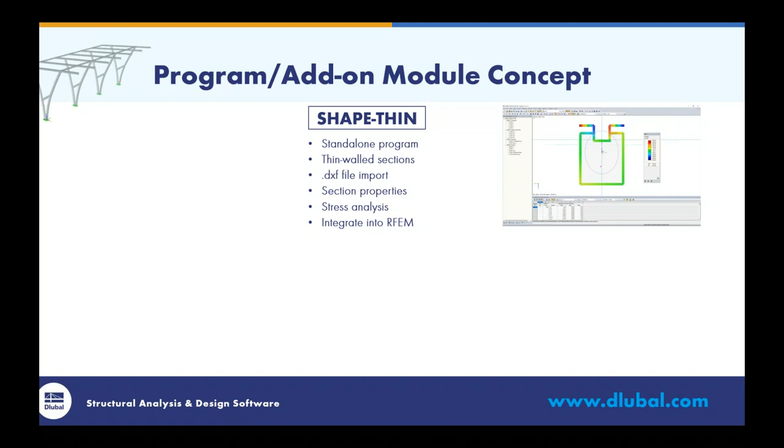These section properties will be calculated. You also have the ability to run a basic stress analysis directly within the program, which we won't be taking advantage of today, but it is an opportunity to do so. Then we take these cross sections along with their properties and we can integrate them into our FEA program, RFEM.

RFEM, again, is a separate program, and this is where we can model our structure entirely. We also can integrate with BIM software such as Revit, Tekla, AutoCAD. We can fully load the structure. We can set up our load combinations, again, according to the ASCE 7, as well as many other international standards, and eventually we get a full analysis.

Now, the analysis will provide us with design internal forces, deflections, support reactions, and we can take this analysis information into our own tools to do the design. Now, if we'd like to do design within RFEM, this is where we'd want to take advantage of the design add-on modules. And in particular, today we'll be looking at RF-ALUMINIUM ADM.

So this is nothing more than just a dialog box that is within RFEM that allows us to do member design for aluminum per the ADM 2010, the 2015, and we have both ASD and LRFD. This does include both ultimate and serviceability design, so we can check deflections as well. This also includes custom extruded sections, which we'll see today, where we take this section from Shape Thin into RFEM and we can design it per the ADM.

Now, this is for unwelded member design. Hopefully, at some point in the future, we hope to add the welded checks, but for now, keep in mind that it is only for unwelded members.

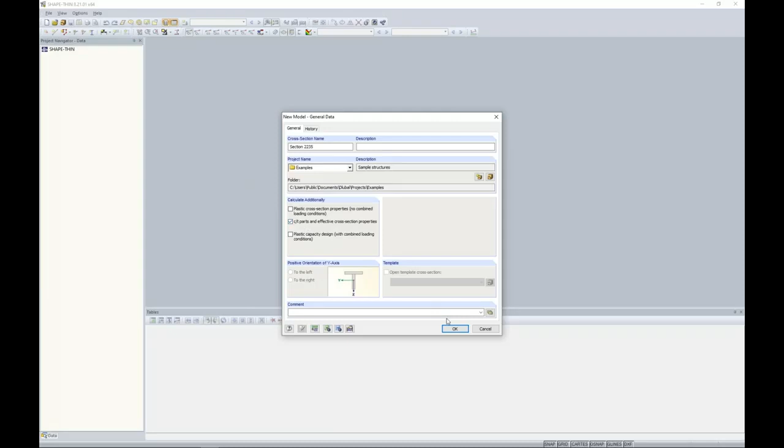So this is not something that maybe some other programs can do, but that requires maybe a little bit more additional work within ShapeThin itself to define this section, and we'll go ahead and see that now. So when I click import, we are brought into our graphical view here where we can go ahead and place the DXF background layer. Now there are a few options here for how we exactly want to place this DXF file. And I'm going to choose this one here where I can further edit it.

So I select this center node, I snap here to my origin point, I can right click to exit out of this dialog box, and now you can see this background layer here. Now it's not so simple that we can just simply mesh based on this import here and calculate the cross-section properties. We somewhat need to trace over this background layer again, and that's to determine the width to thickness ratios for eventually local buckling. But we do have some powerful tools that allow us to actually do that fairly easily.

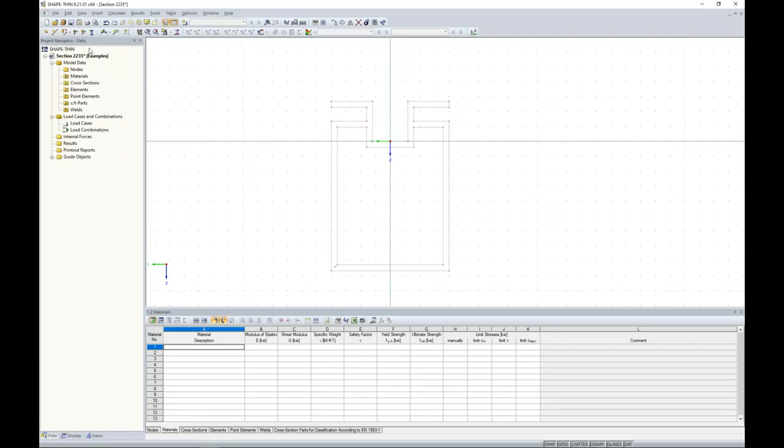So under edit, we have set elements with DXF template. The first option here is to set the center lines. What I can do is to zoom in and I select two lines, and you'll notice that the program automatically places a center line between the two selection lines. So I'm going to focus for the most part on the left side of the structure here, because once I define my elements on the left side, I can mirror it to the right side.

So in addition to setting the center lines, we have this fourth option here to set the elements. So we can manually draw in our elements up here with a new line, but we want to take advantage of these tools that just make our life a little bit easier within ShapeThin. So I want to set my material right now. So I can open up my material database, and you'll see over on the left we have our filters. We can filter to metal, to aluminum, to the ASTM, and eventually the ADM 2015. And we have quite the long list here of all the aluminum materials directly from the standard.

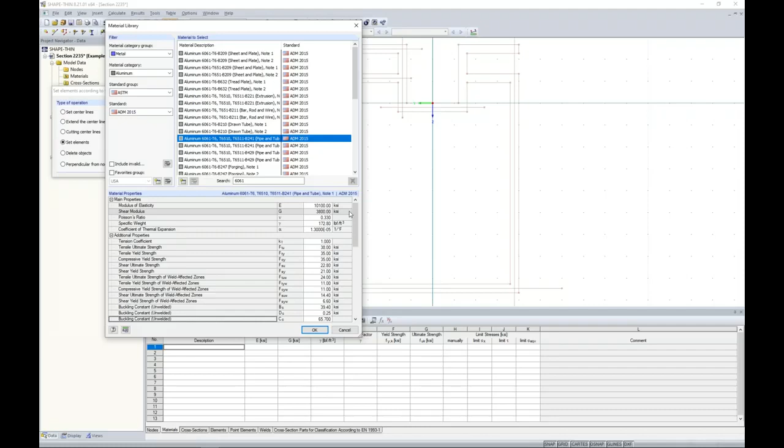Now, if I want to search by a particular material, for example, I can type in 6061 and I can see all of the applicable materials here, where I will choose 6061 T6 for pipes and tubes. Now, all of my material properties are defined here. Quite honestly, the material definition is not so important within ShapeThin if you're not doing a general stress analysis, which we're not today. Eventually, once we get into RFEM, we're actually going to have to redefine the material anyway, but this is just a good introduction of where you can find the materials within the database.

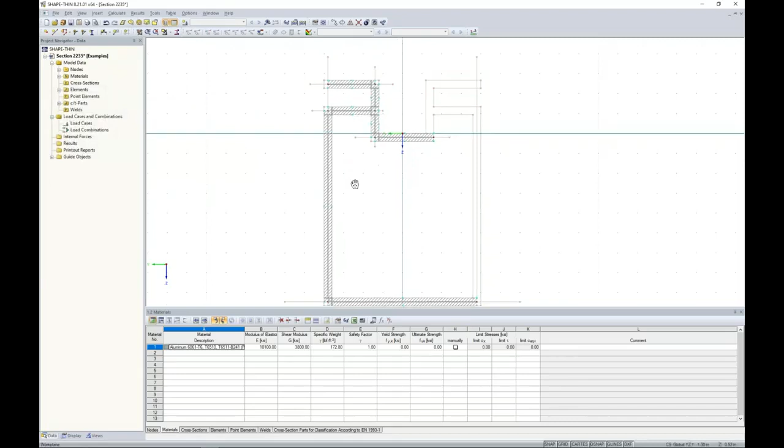So now what I can do is just to simply click on these center lines, and the program detects where the outside boundary lines are for the thickness of these elements. So once I have completed, for the most part, the left side of the structure, you'll notice up here, I want to actually drag this one element to the end. No problem. I can just drag and drop it, and it will snap right to that end point.

I can highlight all of my elements here and use my mirror tool. And the mirror tool is exactly like what we would find in AutoCAD, for example, where we can create a copy. We can mirror about the global z-axis and the origin point. I click OK, and now the program has created all of the elements on the right-hand side. It does create a couple little small segments here that I can just simply delete with my keyboard.

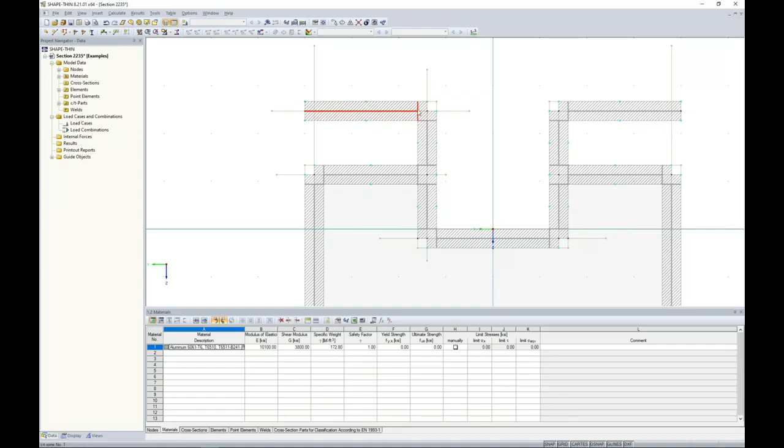Now, you'll see these symbols at each element, and these are the width to thickness symbols, those c/t parts. So this is what's recognizing width to thickness, but even more so, you'll notice that at these closed ends, we have what looks like a T symbol, but at the open ends, we don't have that same symbol. So this, again, is important for aluminum design to tell the program how the edges are supported.

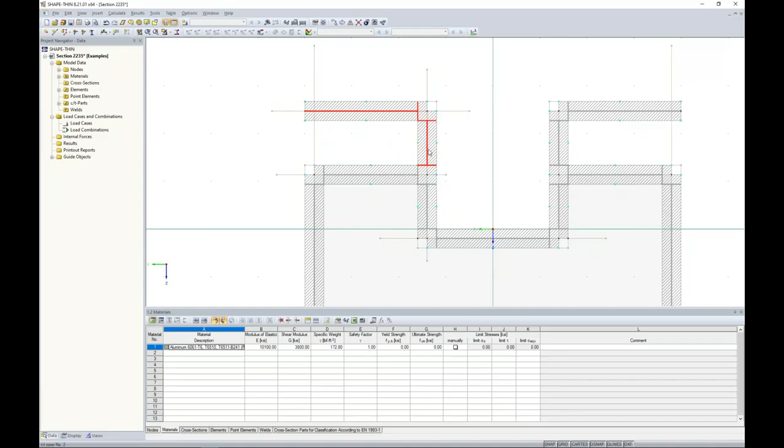And over on the right hand side we can see that it's supported, but over on the left hand side it's not supported. Again, important for local buckling. When we look at one of these other elements that's supported on both sides, we see that T-type symbol on both sides.

So that's all that we need to do, and now we're ready to run our calculation to determine the cross-section properties. So when I go to run the calculation, I will immediately get an error, and it says material number 1 Fy is not positive. So this is the yield strength for my aluminum, and I can immediately look down here to my table, and the program jumps to Fy where it's set to 0.

Well, the reason for that is because aluminum has different yield strengths depending on if it's for tension, for compression, for shear. So all we need to do is just to set some type of placeholder here. Fy equal to 30 is perfectly fine. So that's the reason why the program populates 0 there. So we can rerun our calculation, and now we can see that we are presented with our results.

Most importantly is if we take a look at table 4.1 for section properties, the program has automatically calculated all of the cross-section properties for us, including area, moment of inertia, warping, things like that. So everything has been done automatically according to my calculation.

Now, it's very important now that I save these results. So you have to save the results with the cross-section properties, because in order to integrate in RFEM, we need to know those, and that only occurs with the saved results. We will get a message in RFEM when you try and integrate a SHAPE-THIN section without running a calculation first. So that's all that is required from the SHAPE-THIN side.

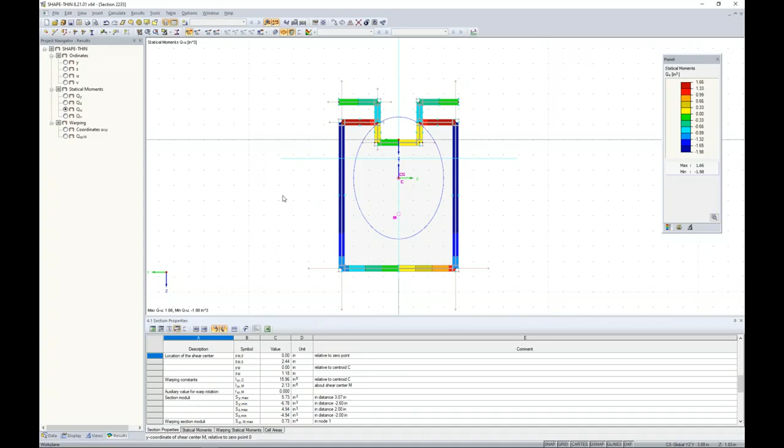So now what we can do is to jump to RFEM. And RFEM, you'll notice, has a very similar interface to SHAPE-THIN. So what's great is that if you know RFEM pretty well, then SHAPE-THIN should come pretty naturally. We want to give this one a name, so we'll call this one Webinar 100. The type of model is 3D.

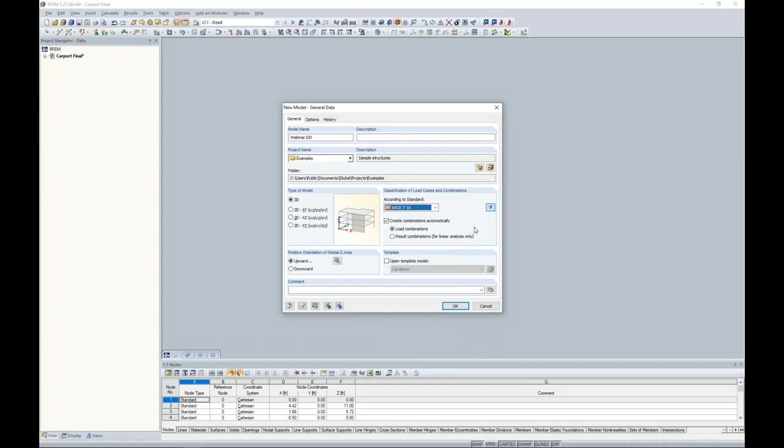We can generate the load combinations automatically according to the ASCE 7 2016. Now, you can see in this drop-down box, we have many other international standards as well, including the NBC 2015. You can always uncheck this checkbox here, and what this allows us to do is to manually create the load combinations instead. But today we want to take advantage of the load combination generator, so we click OK, and we are brought into our main program RFEM.

So to give a quick overview, again, for those of you who are not familiar with RFEM, we have our graphic window right here in the center, and we'll begin to model our structure, and we'll see that built up visually here. Down at the bottom is our table, and we can always import and export data to and from Microsoft Excel. This includes our results that will eventually be presented to us in table format as well.

Over on the left is our project navigator. So as we begin to generate this model here, all of my input data, including my loads, my load cases, combinations, will be all available to me within the project navigator so that I can make quick changes to entire cross sections or to entire material groups.

If we scroll down a bit further, this is our long list of add-on modules. So this again is why we have the concept only pay for what you use, because quite likely you won't utilize most of these add-on modules depending on the materials or the international standards that you utilize for your projects. And finally, we have our tools up at the top, which we'll be utilizing today.

And that brings us to the creation of our first column here, where we will go up to our quick tool here to draw a new member. So when we choose this option, we want to select the member type beam. We can open up our cross-section library. And for aluminum sections, we will probably typically be working with the parametric thin-walled sections, or we can take advantage of the ADM sections directly from the standard itself.

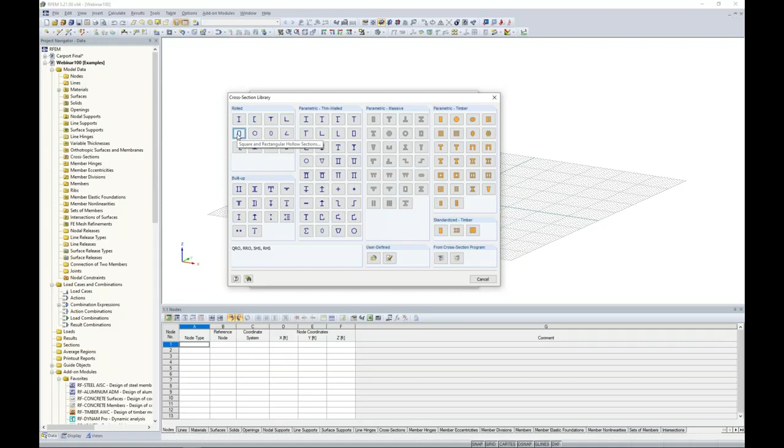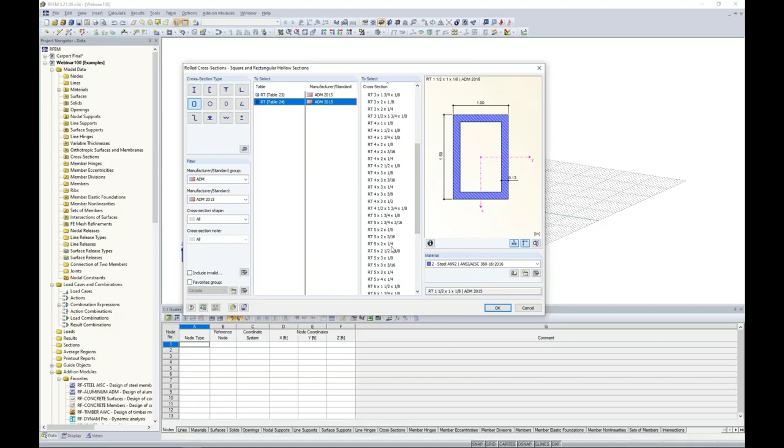So with that, we will choose a hollow square section for today. So I click on my HSS sections, I filter over here to the ADM, and we'll see an additional filter to the ADM 2015. Now, for my first column, I want to select a 5 by 2 by 1/4, and I can just choose it right here in my drop-down box.

Now, the material by default when we first open up the program is 4,000 psi concrete or steel A992. So what we need to do is to choose a new aluminum material from our database.

Well, that's quite easy by launching our material database, and this should look very familiar. It's almost exactly like what we saw within Shape Thin. We can use our filters over on the left to filter to metal, aluminum, ASTM, and the 2015. Once again, I can type in 6061 and I can select 6061 T6 from my list here for pipes and tubes. All of my material properties are presented in this table. I click OK, I click OK.

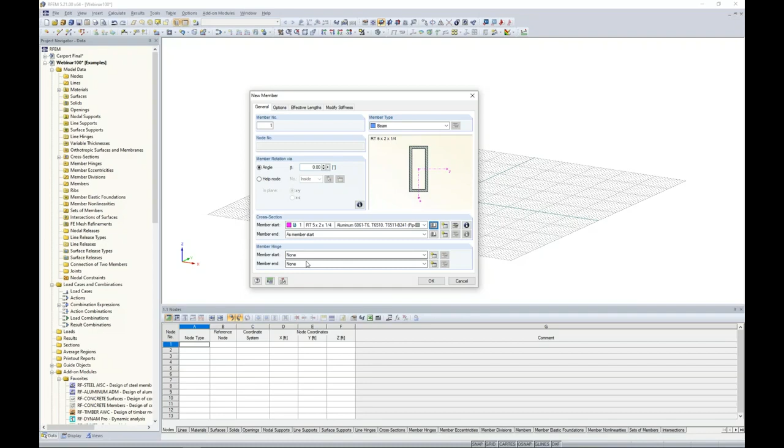And just to also preface this, our model today, everything will be fully fixed, but if you did want to set a pinned member end, you would do so within the same dialog box here by creating a new member hinge. But leaving everything fully fixed, that is what the type none means, so we'll just go ahead and go with that for now. So we want to begin by drawing our column, but I want to change around my drawing grid here to the vertical direction. Well, I can do so by changing my work plane into the XZ plane.

I can scroll down, and instead of a straight line, I actually want to create a curved column, and I can do so by selecting an arc here. So I snap to the origin at 0, 0, 0, and then my second point can either be defined on my work plane here, but in my particular case, I don't have exactly 1 foot increments for my second point, which is what the default is for my drawing grid. So what I can do is just type in the coordinate points directly at 4.42, 0, and 11.

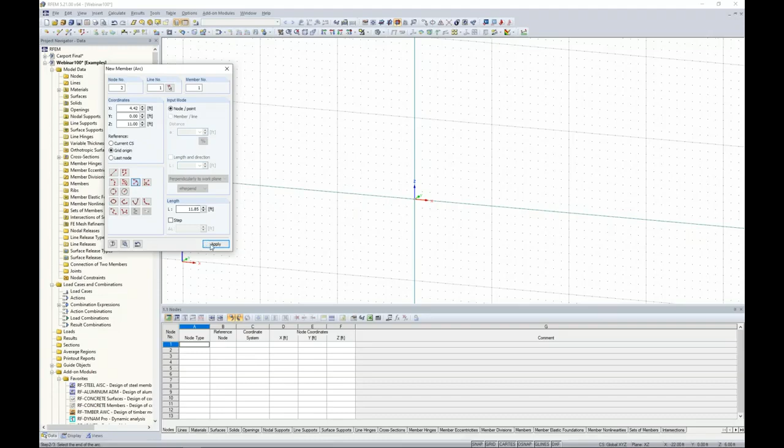Now you want to make sure not to drag your mouse outside this dialog box because as you'll see, everything resets to the current position of my mouse on the work plane. So we'll retype that in at 4.42, 0, and 11. We scroll down here to apply. And now you can either define the radius by once again clicking on the work plane here, or I can just type in 30 feet on my keyboard and hit enter. And so now we should see the curved aluminum column shown here.

In a similar sense, we want to go back and draw a new member. And I want to take advantage of the exact same cross section, the same material. I click OK, and we want to create another curved member. So we'll choose the arc option. Now my first point, again, doesn't fall at these 1 foot increments, so I can specify negative 0.5, 0, and 0. I click apply. Now my second point is going to be negative 3.5, 0, and 11, and I can hit apply.

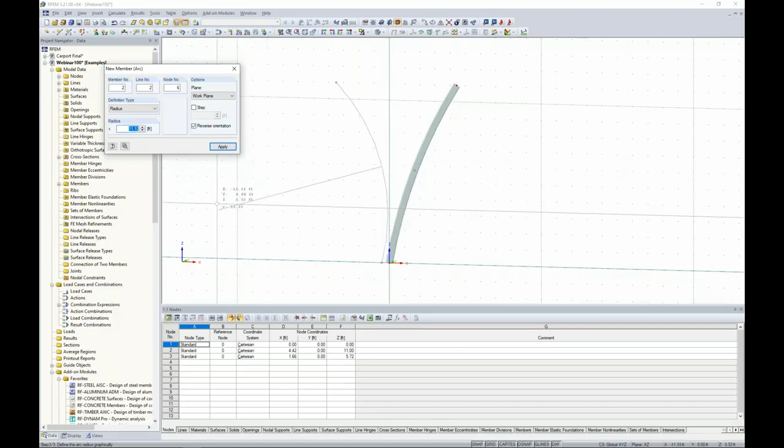Now you'll notice that my radius is actually curving the wrong way. Well, that's no problem. All I need to do is just check the checkbox for reverse orientation. I'll type in 40 feet on my keyboard and I hit enter. And so now we have our second curved aluminum column here. The next thing to do is to apply some type of intermediate brace between these two columns, and I want to do so at some nodes along the member length that I need to create.

So I can right click on my right column and I'm going to divide the member by a certain distance. So with this distance, I have the opportunity to choose the projected direction Z. So what I want to do is to add a node that is 5.5 feet in the vertical direction starting at the base of the column. So you can see here which side is the member start and the member end based on this black arrow here. I type in 5.5 feet for my member start. I click OK. And so now I have divided this member, which has created an intermediate node there.

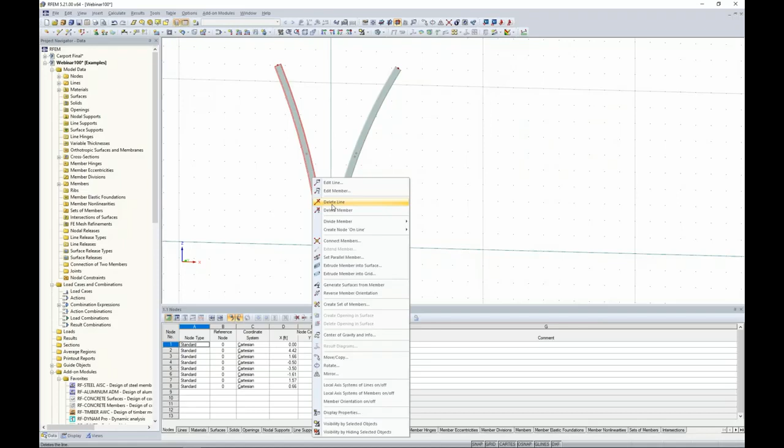I'm going to do the same thing with the left column. I'm going to right click and I'm going to divide the member by a certain distance. Again, we're going to choose the projected direction, but this time it's going to be 4 feet from the member end. You'll notice that we have the reverse orientation for this column, which is no problem at all. So now we have split apart this member as well.

I want to go back to drawing a new single member. And once again, I'm taking advantage of the exact same cross section, the same material. I click OK, but this time instead of the member being a curved element, it will be straight, where I can snap to those new nodes that I have just created to add a small little intermediate brace here.

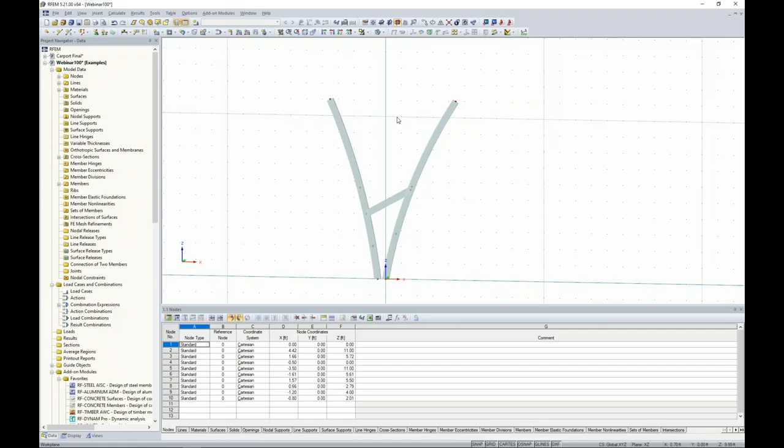Okay, so moving on to the top of our carport canopy structure, we want to import in that ShapeThin section. So what I can do is to go to draw a new member, which we are very familiar with, and to open up my cross-section database. And you'll notice that once this populates over on the right-hand side in the very lower corner, we can import the cross-section from ShapeThin.

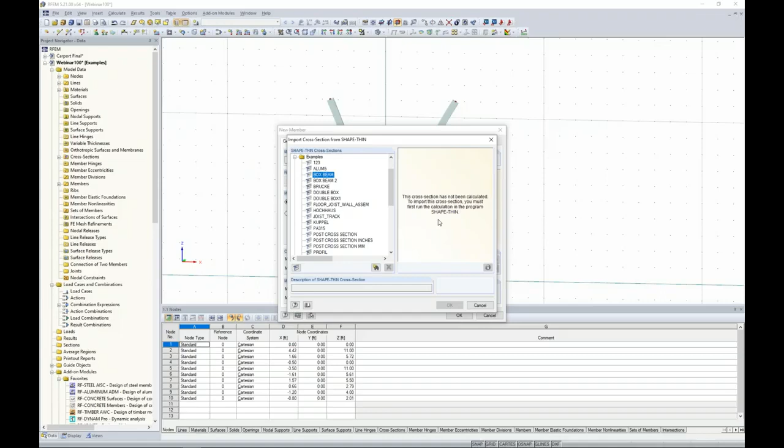So when I do this, we will browse to the file location of where I saved my custom cross-section so we can see it here. And by the way, if you were trying to import in a cross-section where the results weren't saved, you would see some type of warning or note like this, just telling you the cross-section hasn't been calculated, go back to ShapeThin and do so. So this is why the results need to be saved with the ShapeThin file.

So we can see here section 2 that we have just created. We want to import that in. Now notice when we did that, it defaulted to the first material, concrete 4000 PSI, that we have available in our model. So we actually want to edit the cross section, and instead of concrete, we're going to choose the aluminum material that we've already defined in the model. So it's now always available for any additional members that we create within this file. So I choose aluminum 6061. And we can see here that everything looks okay with the material and the cross-section set now.

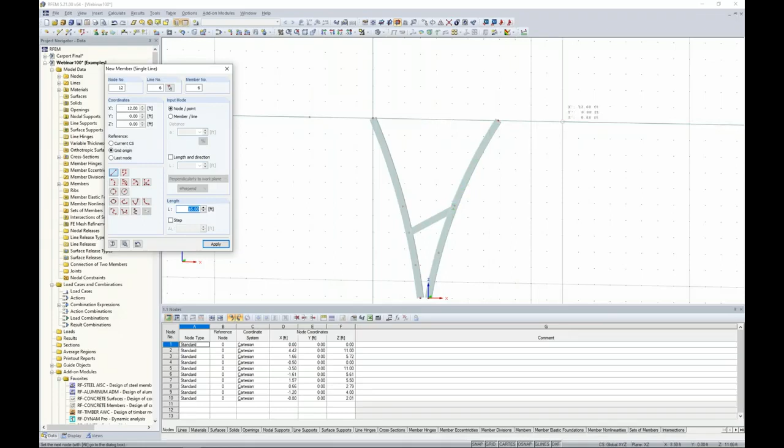I'd like to move my drawing grid so that the origin is now placed at the top of the left column. Well, I can do so by selecting this button up here to set the origin of the grid work plane. And I move to the top of the left column. And now I'm still within the dialog box option to draw my new member. So I'm going to choose a point that is about 4 feet away from the top of the column on the left. And we will span about 3 feet to the column on the right.

So what's also powerful, if I turn off my drawing grid here and I zoom in, is that we do bring in the exact rendered view of this custom cross section. So it's somewhat nice to see the orientation of the member and how it's framing in to these columns that we have just created.

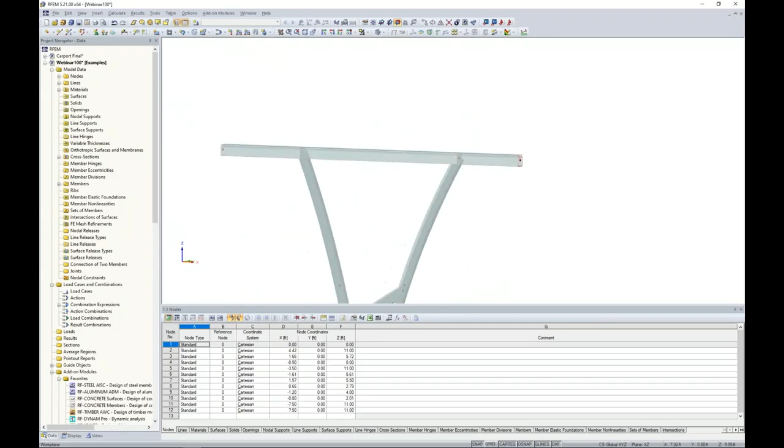So once we have created this main beam up top, I'm going to hold down my control key and select only my members. So you'll notice that I'm paying careful attention to not select the nodes. But there are a couple nodes that I do want to include. So by holding down my control key, I'm going to select the node at the top of my right column and the rear node. Now there is a specific reason why I'm doing this. I want to go to my Move Copy tool in my toolbar. And Move Copy, nothing too fancy about this. We want to make 6 copies in the global Y direction of 4.5 feet.

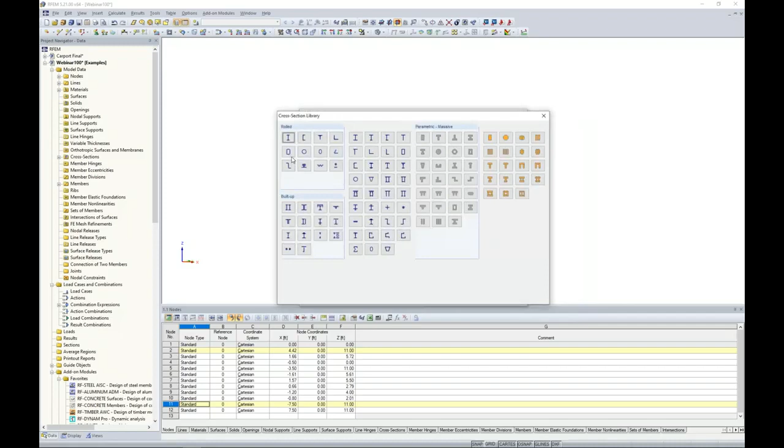And under the Edit Expanded settings, what we have the ability to do is to create lines between copied nodes. So this is why I was careful to only select a couple of nodes that I was interested in. And even more so, we can assign a cross section to those lines. And we can create a new cross section type by going to a new member. And this should bring us to a familiar dialog box where we can launch our cross-section library once again, because I do want to create a rectangular hollow section here.

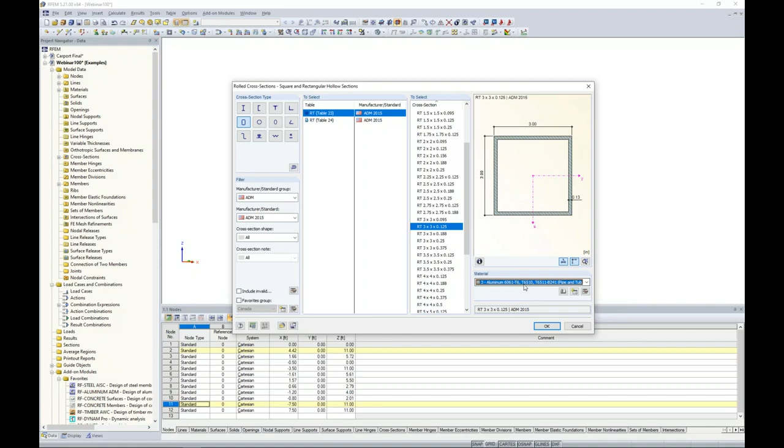So I choose this option, and over on the left we will see our ADM filters once again, and I can scroll down in my list to choose a 3 by 3 by 0.125. I select my material from this drop-down box. Remember, it's already available to us because we have defined it within the model. I click OK. I click OK, and we're back in this Move Copy dialog box.

I click OK once again, and what you'll notice happen is that not only did we make copies, but the program has placed these intermediate beams between our copied frames. So it's just taking a step out of the equation where we don't have to manually draw these beams in here. I want to take a few of these main frames, and I'm holding down my control key and selecting them, and I hit delete on my keyboard because they are not necessary.

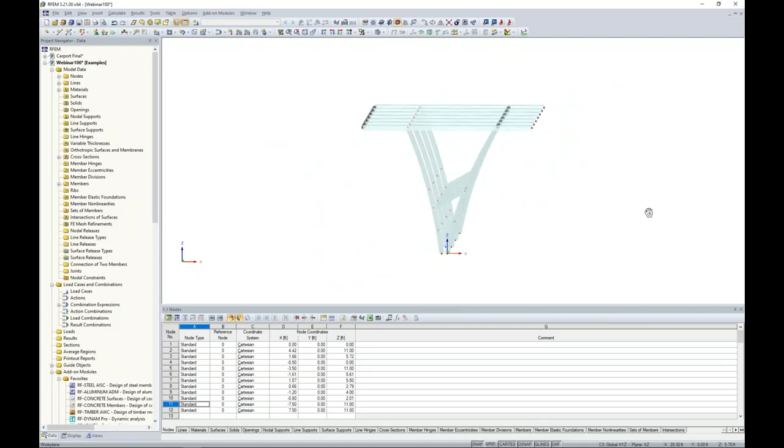So now, for the most part, a majority of our modeling is done with the carport canopy structure. A couple things to add. Number one is that if I wanted to slope this roof at 5 degrees. And normally with sloping the roof, it might be a little bit difficult because we'd have to figure out at what elevation all of these nodes should be placed at depending on their distance away from where the slope should begin.

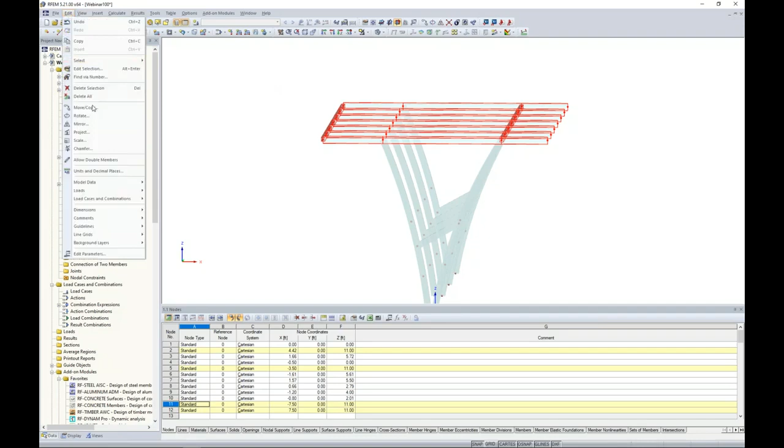But we do, once again, have a nice feature within RFEM that allows us to do that automatically. So I select all of my roof members here, and under Edit, we have the rotate tool. So with the rotate tool, we can define an angle of -5 degrees. We want to rotate it about the global y-axis, and we want to rotate it in the direction of z.

Then I can graphically pick the point where I'd like the rotation to begin. So I choose at the top of my right column any one of these points. The program populates the coordinates. I click OK, and now my roof has a 5 degree slope to it. So again, just a nice feature so that we don't have to manually determine what all these different elevations are based on a 5 degree slope.

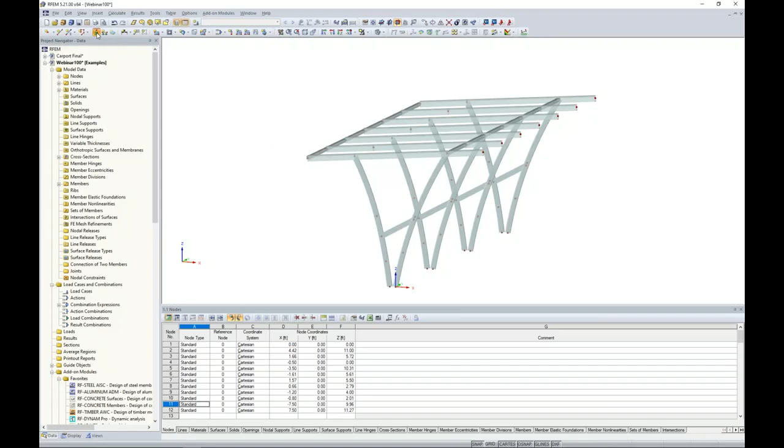The last and final thing to do with modeling of our structure is, of course, to support it. So we can go up here to a new nodal support. Now we have a few default options, including hinged and rigid, pin type support, or fully fixed. We can always create our own type of nodal support, which you'll see are 6 degrees of freedom here for rotation and translation. If you have partial fixity for somewhere in between fully fixed and fully released, you can set that.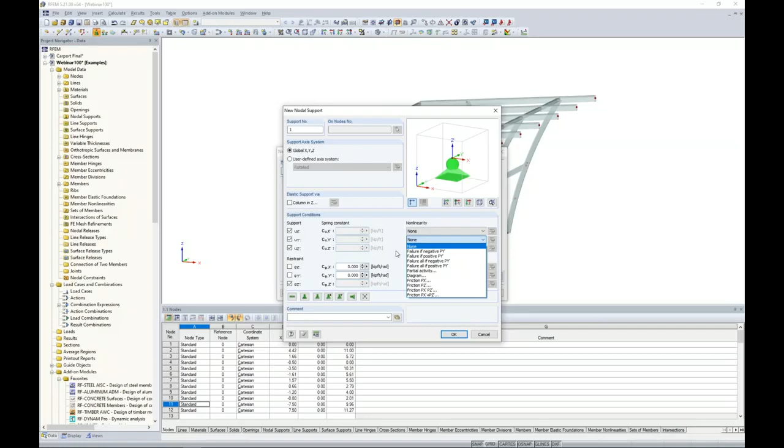Or because RFEM is a nonlinear analysis program, you can set these geometric nonlinearities so that perhaps the support fails in uplift, for example, or sliding or friction or anything of the sort with partial activity. For today, we want to choose the default fully rigid option. I click OK. All that I need to do is to highlight across the bottom of my structure, and now those fixed supports are applied to the bottom of those columns.

So we are essentially done with the modeling, and we want to move on to loading. And what we need to start off with loading is, of course, defining our different load cases. And we can do so within the option up here to define a new load case. So this will bring up our load cases and combinations dialog box. The first load case to create will be dead load. The action category is set to dead. Action categories are important because this tells the program exactly what load factors to apply to each load case based on the ASCE 7 or whatever standard you're using for the automatic load combination generation.

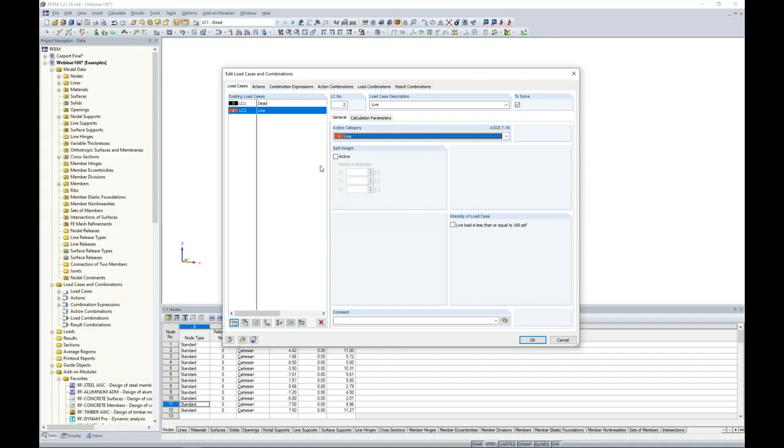The self-weight is automatically checked here for dead load, but when we create a new load case, and we'll call this one live load with the action category of live, we want self-weight to be unchecked because we don't want to account for it twice. Now, because this is a carport structure, maybe we want to consider the possibility of impact loads. Perhaps a car could unfortunately drive into one of these columns, and we want to account for that. So we'll create a couple of additional live load cases for impact.

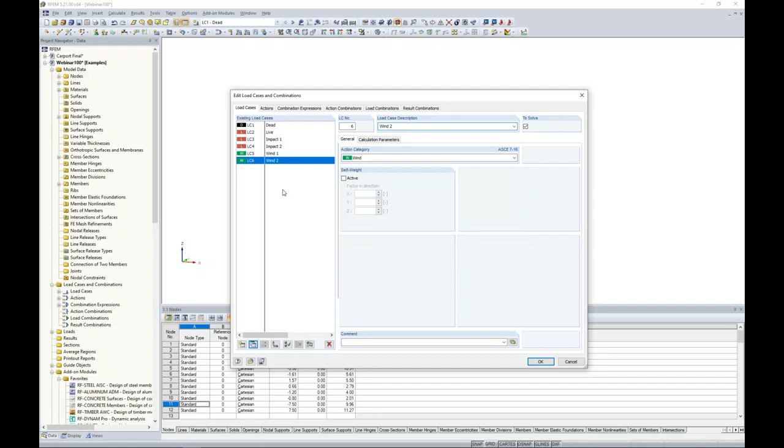So we'll call this one Impact 1. And the action category is set to live. We can make a copy of this load case and we can rename it to Impact 2. I'm going to create a load case here for Wind 1 with the action category of Wind. And once again, I'll make a copy of this one and create a second load case for Wind 2. Now, of course, you'll probably have many more load cases for your project design, but for today's example, we will just stick with these. So under the Actions tab, this is important because here are my actions that I've defined:

dead, live, and wind. Now, under live, I have my live load, which will be some type of area load at the top of my roof structure. I want that to always be acting within these load combinations, but Impact 1 and Impact 2, I don't want everything to act simultaneously as we have it set here. Instead, I want Impact 1 to apply or Impact 2 to apply along with the first live load. So how we can do that is by setting the option for differently here. So live load can be set to no group, Impact 1 can be set to group 1, and so can Impact 2. So now the program will apply Impact 1 or Impact 2. Alternatively, it will not apply them at the same time.

It's a similar concept for wind load. Wind loads are automatically by default set to alternative, so it won't apply wind load 1 plus wind load 2, it will apply wind load 1 or wind load 2 within our load combinations.

The combination expressions, this is just the program letting me know that it will create LRFD load combinations as well as ASD load combinations. If we have any question about what those load combinations look like, we can click this little info button to see them listed directly from the standard.

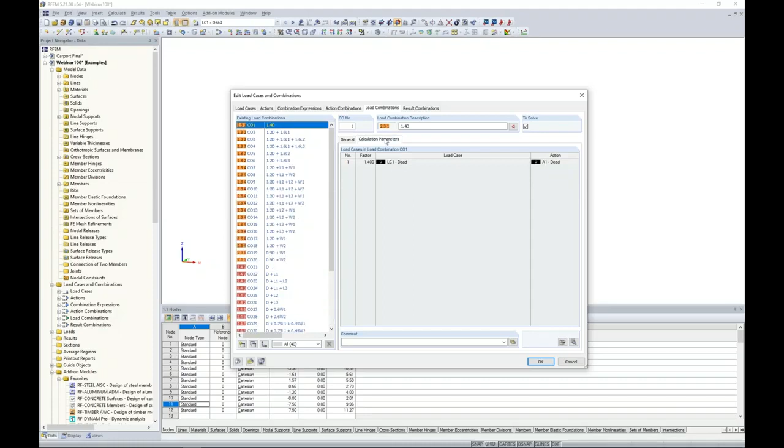Now, probably most important is the actual load combinations tab here, because this is going to show me all of my LRFD load combinations in orange and then my ASD load combinations in red. The calculation parameters for load combinations by default is set to second order analysis, considering both big P delta and little p delta for all members.

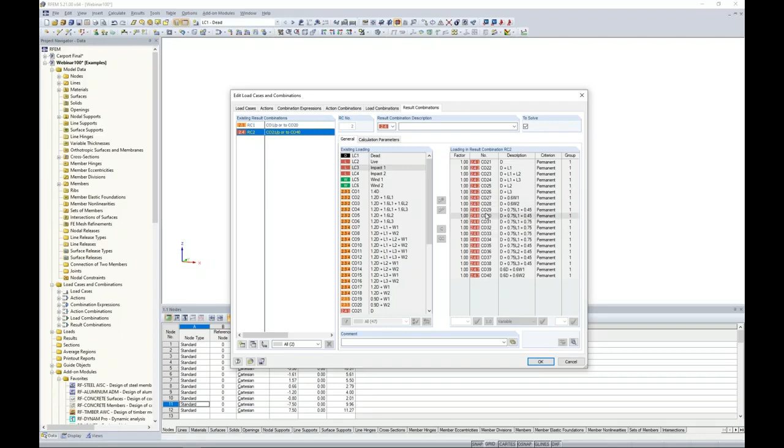The result combination is nothing more than an envelope solution. What the program does is create a result combination for all of my LRFD load combinations, and we have a result combination for my ASD load combinations. This allows us to graphically or within our tables see the max and min results within all of these load combinations combined, essentially just a result summary.

So once we are done defining our different load cases here, we need to actually apply the loads to the structure. We're going to select dead load from my drop-down box here, and I want to apply a downward area load to the top of my structure to account for, let's say, some PV panels that will be placed on top of there.

Under Tools, we can go to Generate Loads from Area Loads on Members via a plane. Rather than having to manually define what all these different member loads are based on their tributary area, we can let the program do that for us. We choose the load direction in the global Z, which will be the downward direction. We give it a magnitude here of negative 0.02 kips per square foot, and I am going to select my corner nodes here by just graphically clicking on the 4 points.

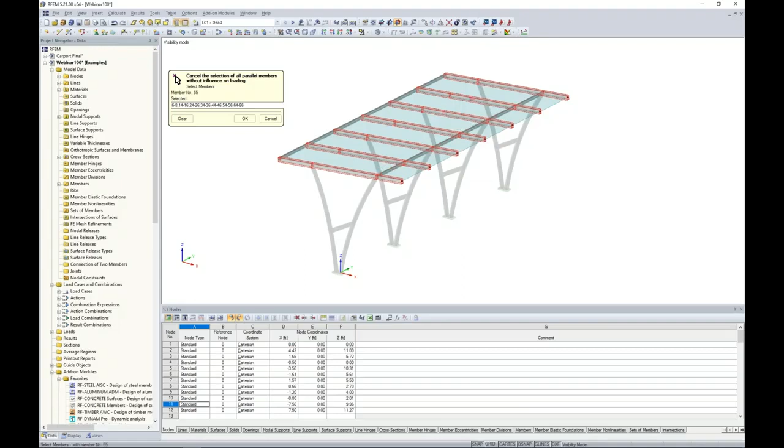Now we also have the ability to exclude members parallel to a particular member. What I mean by that is I can select one of these intermediate beams here framing in and out of the page. I select one, and you'll notice that all the rest are selected, if we do not want the load applied to those, but rather our main beams instead.

I click OK, and now you can see our area load generated, but even more importantly, if we right click and display separately, we can see the area load magnitude split up for each individual member based on its tributary width.

We now want to scroll to live load, and actually it's the exact same concept here. We'll go back to Tools, Generate Loads from Area Loads on Members via a plane. What's nice is that the program remembers all of my settings from the previous application, so all I need to do here is change my magnitude to something slightly smaller. I click OK, and now for live load, you can see here the member loads applied based on their tributary area.

Now for impact load, this comes from the ASCE 7 2016, specifically section 4.5.3 for vehicle barrier systems. The code tells us that for impact loads, we should consider a 6 kip load applied anywhere between 1 foot 6 inches to 2 feet 3 inches above the floor.

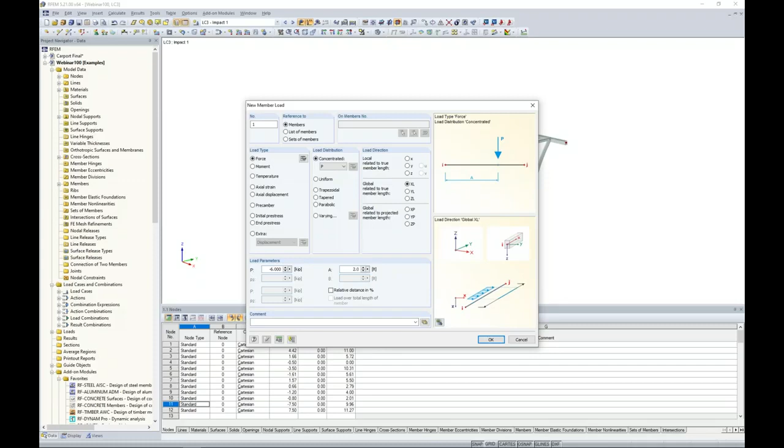So for this application, I want to consider an impact load on my center columns here. I'm going to go to a new member load, and instead of applying a uniform load, I can just change this to a concentrated load. With a concentrated load, we want to apply this in the global X direction, the lateral direction. We want to give it a magnitude of -6 kips, and apply it 2 feet from the member start. So I click OK.

Then I can just click on my column directly to apply that impact load. I scroll to the next load case, impact 2, and you'll notice that my option to apply loads is still active, so I can easily click on my column for the next load case to apply my second impact load. I right-click to exit, and now you can see here as we scroll to the two different impact loads why we wouldn't want these acting at the same time, but rather we wanted either one or the other.

Now, of course, maybe we'd want to add some impact loads to our exterior columns as well, but we'll just keep that for the simple application for today.

Now, for wind loads, we do have an automatic wind and snow load generator. The snow load generator would be sufficient for this canopy type structure. The wind loads, unfortunately, cannot be used because we only have partially enclosed and enclosed structure options for our wind load generator. Typically, for canopies, you would be considered open structures, so we will need to manually apply our loads for today.

So what we want to do is go back to the area loads on members via plane in order to apply those. But before I do, when we're manually taking a look at these calculations for our wind loads based on open structures, or maybe we have some spreadsheets to do so, I want to touch on a tool that we have on our website.

If you go to dlubal.com and under solutions, you'll see the GeoZone tool. What we have done is integrate the maps for snow, wind, and seismic directly from the ASCE 7. You'll also see the NBC standard as well as many other international standards. This is also integrated with Google Maps technology, so we can type in the location address, or click directly on the map.

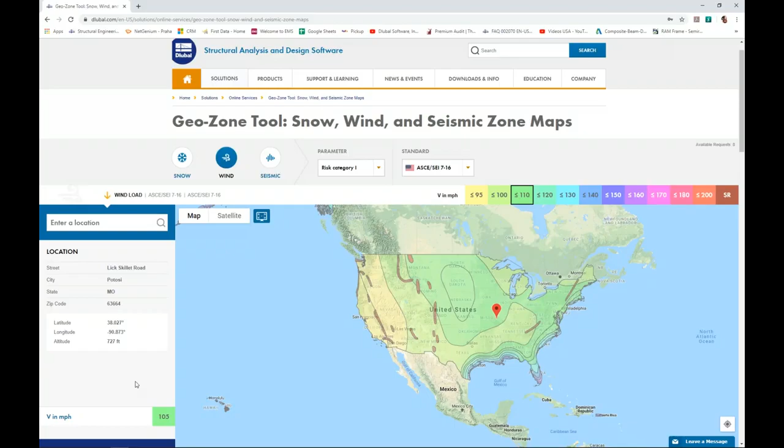We're looking at wind for risk category 1 here. We can see that the basic wind velocity is set at 105 miles per hour. So this is a little bit more efficient than opening up the code and flipping through all those different maps. You can take advantage of this. Keep in mind the first 10 or so clicks are free, but if you plan to heavily utilize this tool, you'd like to buy a package within our web shop.

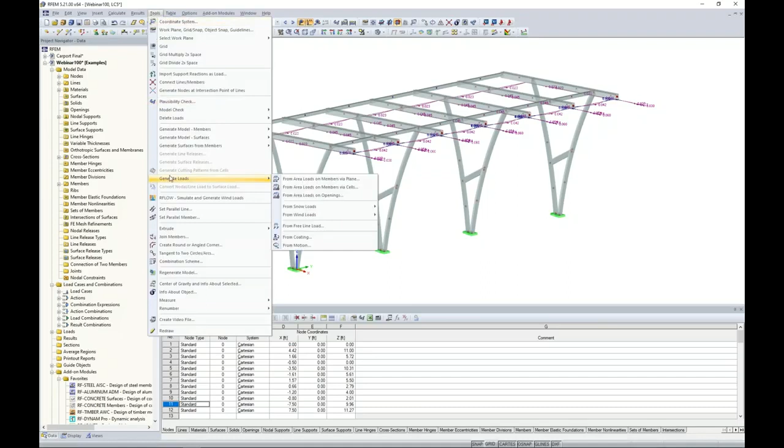So under tools, we also want to apply a downward load. For this, we modify the load direction in the global Z direction, modify the magnitude to negative 0.005, and maybe we actually do want to exclude those intermediate beams here from my downward wind loads. I click OK. So all within this same wind load case 1, we can see a downward wind load along with the lateral load applied.

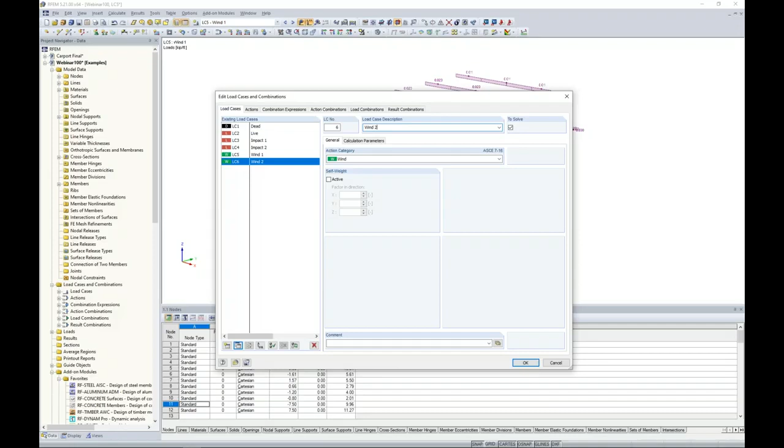Now, a nice trick is that for wind load 2, I'd like to essentially keep the same load application, but just modify either the magnitude or the load direction. So instead of going back and once again applying area loads with the load generator, I go to my load cases and combinations, and I take wind 2 and completely delete it. Now when I take wind 1 and make a copy and rename it to wind load 2, the benefit is that since I've already applied my loads to my load case, it will copy the loads along with the load case to wind load 2. So when I click OK, I've copied all those loads from wind load 1, and now I'm looking at wind 2.

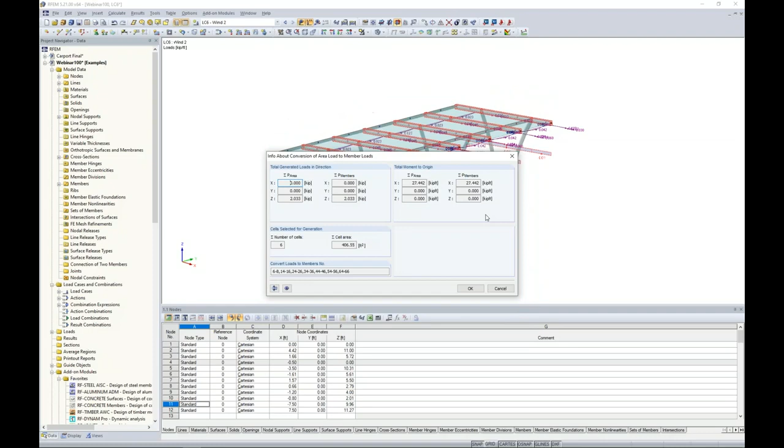All I need to do is double click on my top load here and reverse the orientation, reverse the magnitude here for an uplift force instead. So that's just a nice way to quickly redefine loads by copying the actual load case itself.

So now that we have defined all of our different load cases, we can scroll through the different load combinations and see these applied to the structure at once, including live loads, impact loads, and wind loads. Everything is shown here.

Now, before we are ready to run our analysis, there is one thing I want to discuss from the ADM, and this is the stability requirements according to section C2. I actually did a previous webinar around 2 years ago, but everything is still applicable to design today according to the ADM 2015, and I went into much more detail about the stability requirements in Chapter C. Certainly refer to that on our YouTube channel or on our website - you can just search ADM and that will bring up that previous webinar.

But today, what I do want to apply is the reduced stiffness requirements from section C2. The code tells us that we need to reduce the flexural stiffness by a tau sub b factor, and the tau sub b factor is an equation that needs to be iterated based on the axial forces within our member.

Additionally, there's a 0.8 factor that should be applied to bending and axial. And lucky for us, these requirements are almost identical to what the AISC requires.

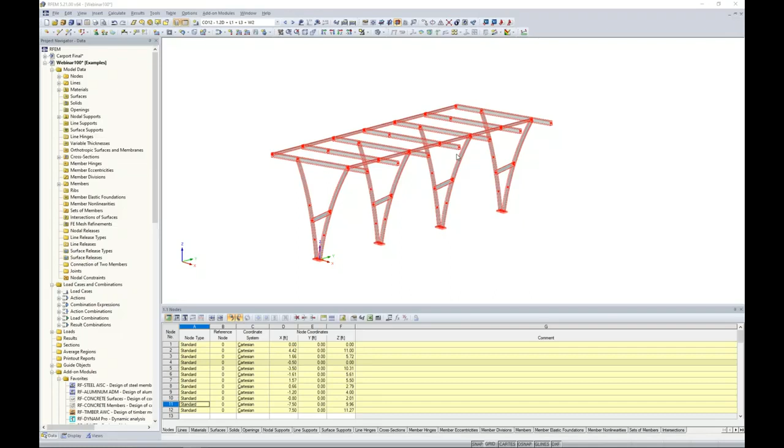In the program, when we highlight all of our members, we can right-click to edit the member. When this dialog box pops up, you'll see a Modify Stiffness tab, which allows us to modify the stiffness according to the AISC 360. Again, the ADM 2015 lines up exactly with the requirements from the AISC.

We will determine what that tau sub b factor is, and we will also apply a 0.8 factor to the flexural and axial stiffness. So this will be applied to all members that contribute to the lateral stability. It's also a conservative approach to apply this to all members, including gravity members.

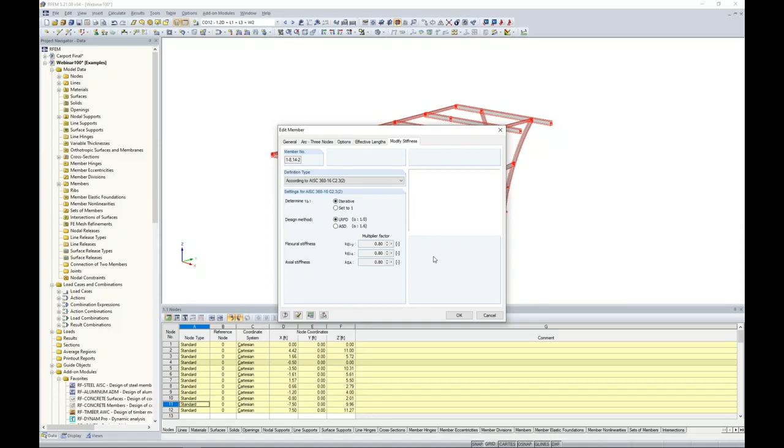So I click OK. And you might be asking yourself, okay, the stiffness reduction is great for my design combinations for the ultimate limit state, but for serviceability or deflection, I don't want to reduce that stiffness. So how do we separate that out?

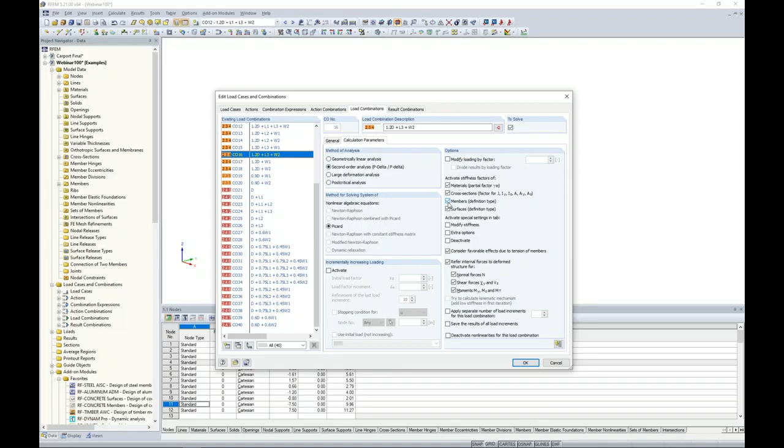We can do so directly within our load cases and load combinations tab. What I can do is select all of my ASD load combinations here by holding down shift. Under the calculation parameters, we have the ability to uncheck the members here for the stiffness factors. This will no longer reduce the stiffness for all of my ASD load combinations, which are typically used for deflection. But if we take a look at some of our LRFD load combinations, sure enough that checkbox is activated again, so we will reduce the stiffness based on the stability requirements within the ADM.

Now we are finally ready to run our calculation. So we go to calculate all, and the program is going to cycle through about 40 or so load combinations, running a nonlinear analysis to account for secondary effects of P-delta and P-little-delta.

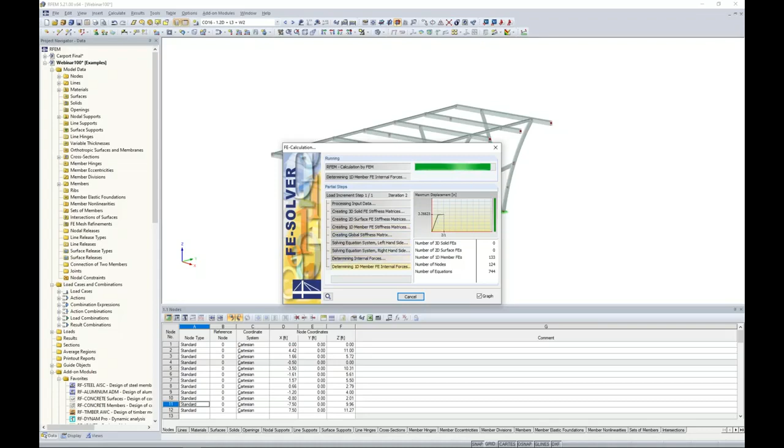Once this is done running, we will be presented with our results directly within RFEM. We'll notice now that we have a results tab available to us. Currently we're looking at the deformations of our structure, which is a little difficult to see here because it's just based on the center line.

Under the display tab, this controls everything that we're viewing graphically here. We can turn on and off different elements, change the view — for example, the results tree. We can expand out the deformations for members, and change this to cross sections colored. I can even smooth my color transition to make it look a little nicer here.

Now I can scroll through to my different load combinations to see the reaction of the structure under different applied loads. If we're also interested in seeing how the structure behaves, we can play the animation here as a short video. I think this is useful because if we incorrectly modeled something, we'd probably see some odd deflections in this video. We can export this out and save it to our computer as a video file as well.

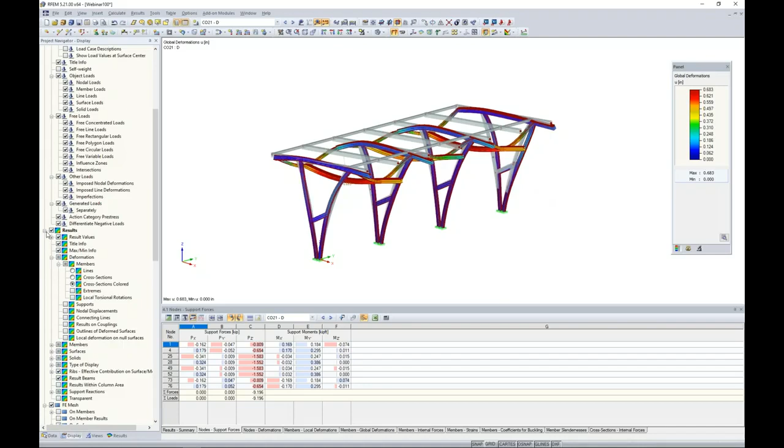In addition to deflections, we're also very interested in member internal forces. We can go back to our results tab and scroll in to view these members in closer detail, looking at axial forces, shear forces, and bending moments. These are all available to me graphically.

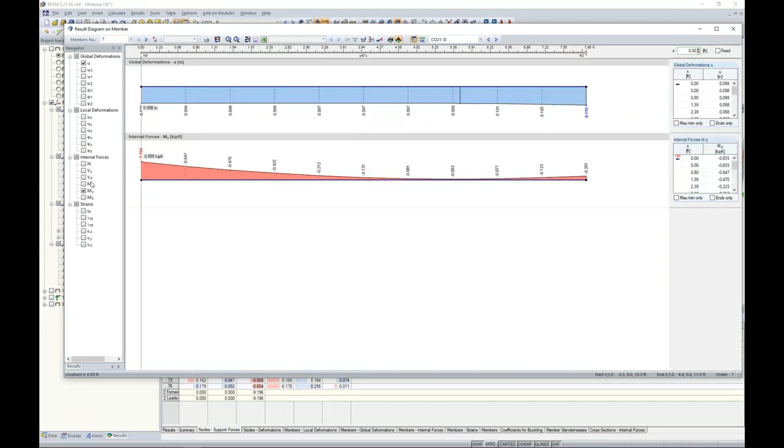I can also right-click on any one of these members to go to the results diagram. The results diagram will show me in more detail what's going on along the member length, where I can turn on and off these internal forces and deflections. I can also scroll through different load combinations here and export them out to my printout report, maybe a little more detailed than what we can see graphically here.

In the same concept, we can also view our support reactions. We can turn those on graphically, and again all this information is available within our tables. We're currently looking at table 4.1 for support forces. You'll notice the table synced up with RFEM here, with the big red arrow showing me exactly where I'm at according to this table that I'm clicking in.

So we can export all of this information, support reactions and internal forces, to our own design tools, such as Microsoft Excel or maybe some in-house tools, to provide the design.

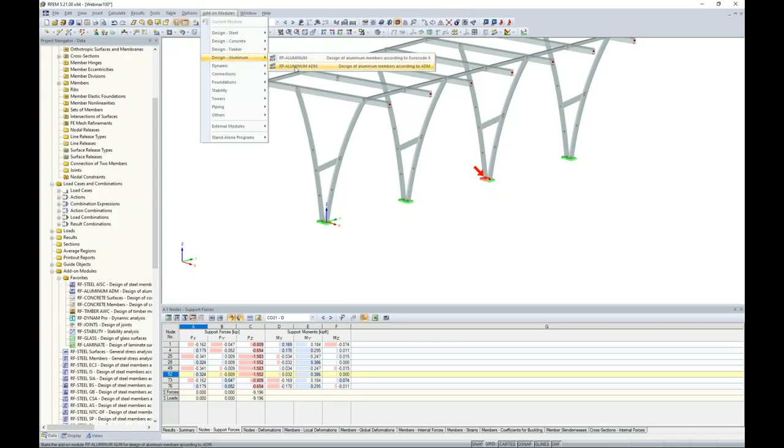But if we want to take it a step further within RFEM, then this is where we want to take advantage of our design add-on module, RF-ALUMINUM ADM. So we can activate the add-on module within our project navigator over on the left, or we can access the add-on modules under our drop-down at the top. This is nice because they are categorized a little bit nicer, where we can go to design of aluminum per the ADM. Now, when I choose one of these add-on modules, notice that it's just a dialog box that pops up within our main program.

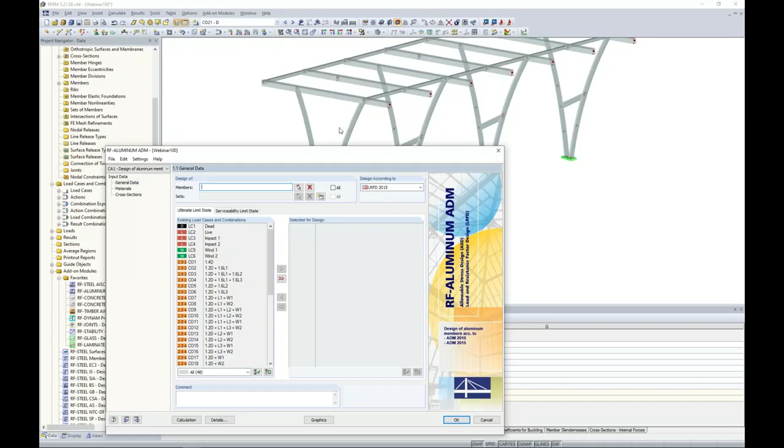I don't have to worry about remodeling any of this information or redefining cross-sections, materials, load combinations. It's all brought in. What we're doing here is specifying information that is specific to the ADM module, including things like unbraced lengths or which load combinations we want to consider for design. So I'd like to start off with a fairly simple case here for introduction into this module. And I'm going to rename my case here to secondary beams.

I click OK, and I want to select the beams that I would like to design for this first case. Well, I want to design these intermediate beams. Now I can individually highlight these and select them, but a better option under the Views tab is to select my members by cross-section. And I will choose the 3x3 cross-sections, and now you'll notice that everything is grayed out within the rest of my model. So now I can easily highlight the entire model with only selecting those 3x3 cross-sections.

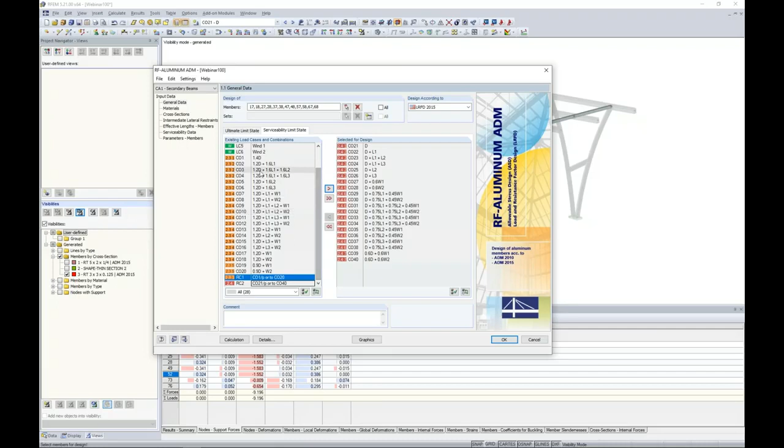We want to choose the LRFD 2015 for our design. And for our ultimate limit state, this is where we choose our LRFD load combinations. And serviceability limit state would be our ASD load combinations, again, brought in directly from RFEM, considering stiffness modifications and everything else that we've previously set. All we need to do now is to simply move down our list over on the left. The materials are brought in from RFEM. We're still utilizing aluminum 6061. We have our cross sections here with our 3x3 with the cross section properties shown.

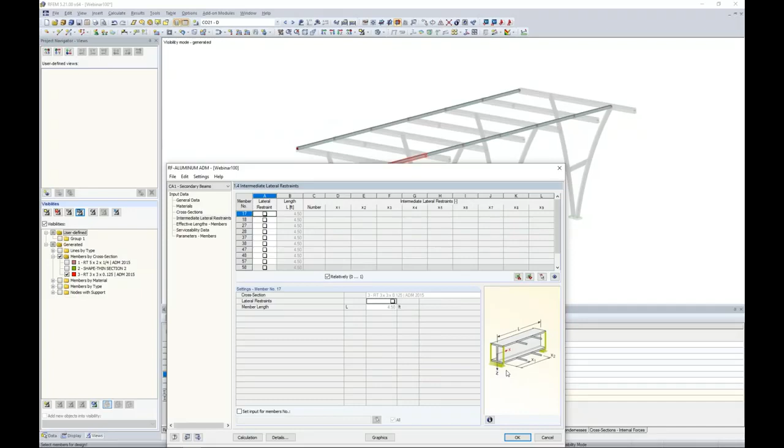Intermediate lateral restraints, if we had any top and bottom flange bracing. Now this isn't so applicable, for example, today with tube structures, but maybe you had some type of I-beam as shown, then you would set the intermediate lateral restraints under this table here. The effective length. So this is our stability design. We have strong axis buckling, weak axis buckling, lateral torsional buckling, and flexural torsional buckling.

So to explain a little bit about all of these different options, you'll notice here that we have the effective length factors. Well, section C3 from the ADM tells us that we can use K equal to 1.0 unless a smaller value can of course be justified. So we'll go ahead and leave all of these values set to 1.0. Now the effective length, which is our K times our unbraced length, is our next column here. By default, everything will populate according to the member's length back in RFEM. So in this case, they're all 4.5 feet. Same thing for unbraced length in the weak axis direction.

So if by chance you didn't model in some members here, or maybe those PV panels are bracing these members laterally, for both strong and weak axis direction, then you can go ahead and adjust the unbraced lengths here. But for today, we'll just keep all of those to default to the full member length. Lateral torsional and flexural torsional buckling are very interesting because we have the ability, again, to set unbraced lengths here for LW, which would be the lateral torsional buckling length, or LT, which is the flexural torsional or torsional buckling length. So if those differ from the full member length, you can adjust those here.

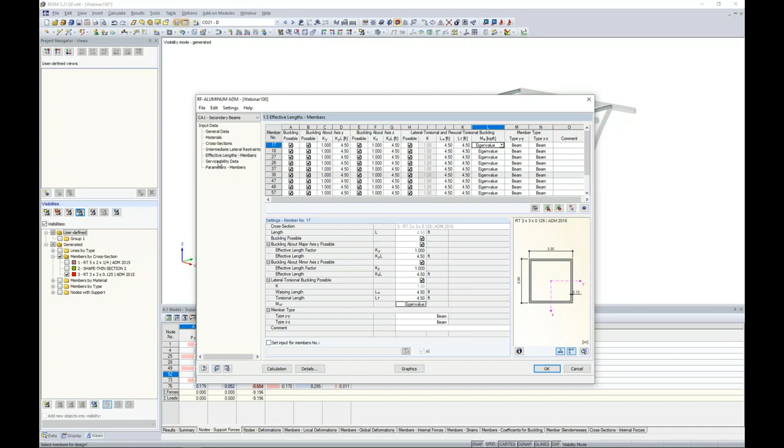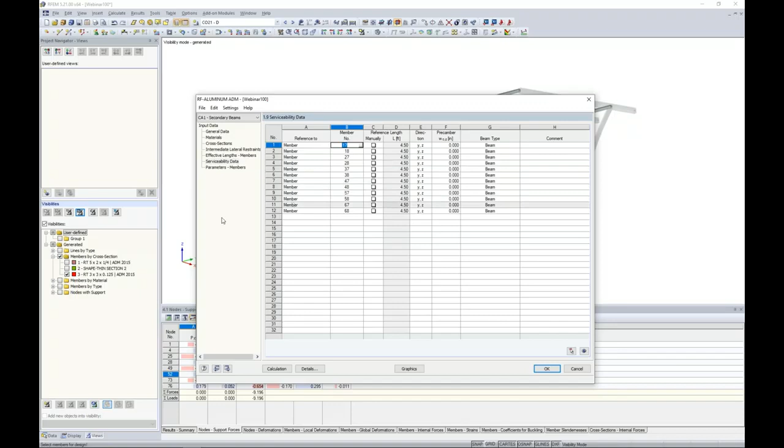We can put in here a pre-camber. We specify if it's a beam or a cantilever. I'll show you in just a minute exactly where we set the limiting deflection ratios, because we need to have something to compare this to, of course, to the deflections that the members are experiencing from the analysis.

And what we'll do within the program is to automatically calculate your effective net cross-sectional area, A sub E, which is ultimately used for the tensile rupture capacity. So if we do have that situation at either the member start or the member end, this is where we can reduce that area here.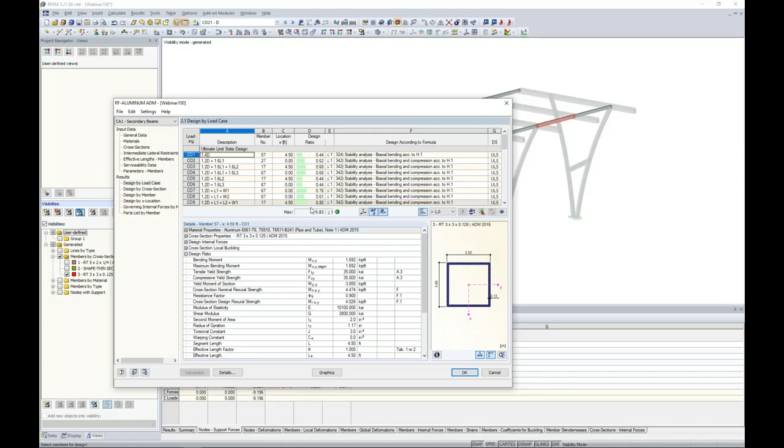So once we have defined all of this information, we hit calculation, and you'll actually see that the program solves this rather quick because we already have all of our internal forces from RFEM. We're just bringing them into this add-on module, applying the ADM calculations, including the quick little eigenvalue analysis for stability, and then ultimately we're coming up with our results.

Now we can view design by member. And again, when I'm looking at these tables, you'll notice that everything is synced up in the background. So I can take a look at this particular check. This big red arrow is telling me where the controlling internal force is for the axial check, for example, and biaxial bending according to chapter H.

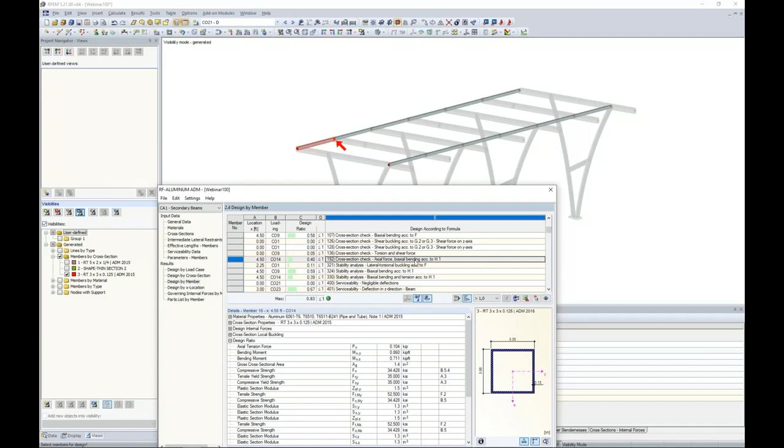What's also really powerful is that for each member, we're giving you the results for every check within the ADM. So you're going to see here shear checks, bending checks, biaxial bending, axial forces, and of course, lateral torsional buckling and stability checks for biaxial bending. The reason why we do this is because we don't want to be a black box program, but we're trying to give you as much information as possible so that you can understand where the numbers have come from. In addition, you'll see all of the variables listed here along with the code references.

By all means, though, if we're not really interested in seeing all of this information, but we just want to know what is the controlling check for each member, we can easily use our filter option here to filter by max, and now we can see for each member exactly what's controlling.

So in many of these cases, stability is controlling, and I just want to point out that for any one of these stability checks, we actually can view a graphic of our mode shape. So this is what's going on in the background when it's running this eigenvalue analysis to determine the critical buckling moment. So just a nice feature to see what's going on there.

Now, all of this information is available to us graphically, so we can click the graphics option. Now, we're within the RF-ALUMINIUM ADM module. We're just viewing these code check results graphically back in RFEM. So I can take a look at my ultimate limit state design, or if I want to turn off ultimate and view my serviceability limit state design visually, I can see both of those there.

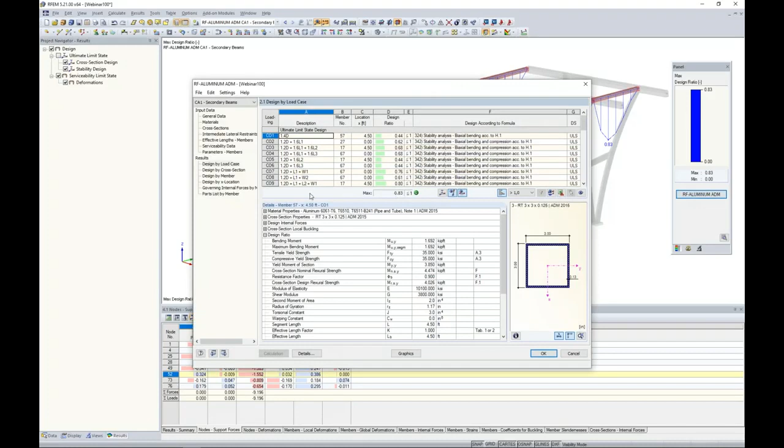We also can go back to the ADM module and view a parts list by member. Again, all this information can be exported directly to Microsoft Excel. So that's just a quick introduction to the aluminum ADM module with a fairly simple example for these beams. The other quick example I want to show you is, of course, with our custom extruded sections that we brought in from ShapeThin, and how we can also design those within the module.

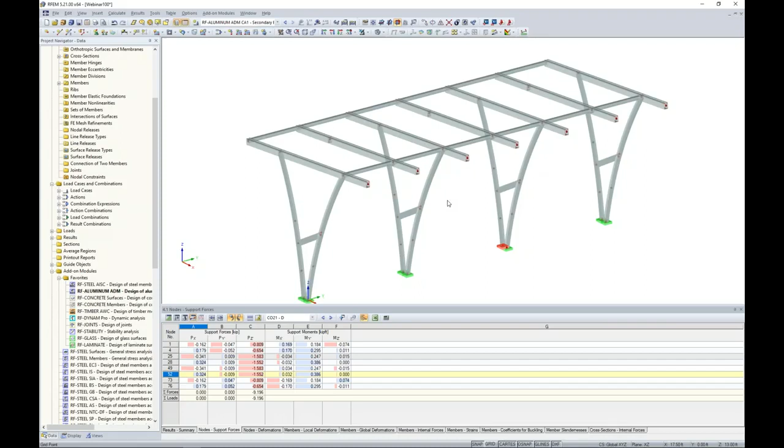Now, notice that the program has broken apart these members here based on where they were framing into the columns. And actually, that's not a big deal at all. So what we want to do here is, under the Views tab, I'm going to select all of my ShapeThin sections. And we'll turn off my 3x3 sections.

I can highlight all of my members here. I can right click, and under member, we have the opportunity to create sets of members. So what the program does is it groups these individual members into what's called a set of members, which just places a very faint dotted line around these segments.

So you'll notice that I didn't have to clear my results for the analysis. It does not affect the analysis whatsoever that these are broken apart into separate segments. But for design, maybe we are interested in designing this as one continuous member rather than individual segments, which, by the way, both are possible. But I just want to show you the benefits of designing a set of members quickly.

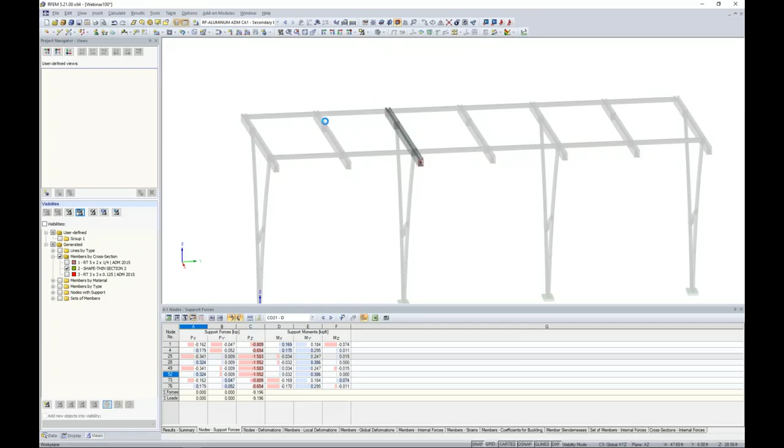So we'll start off by designing our set of members that I've shown highlighted here. We go back to our RF-ALUMINIUM ADM module, and I'm going to go to File, New Case. For this one, I'm going to call this one Main Beam. I click OK. What the program gives me the ability to do is to always jump back to my secondary beam design. So I've just created a second case here within my dropdown.

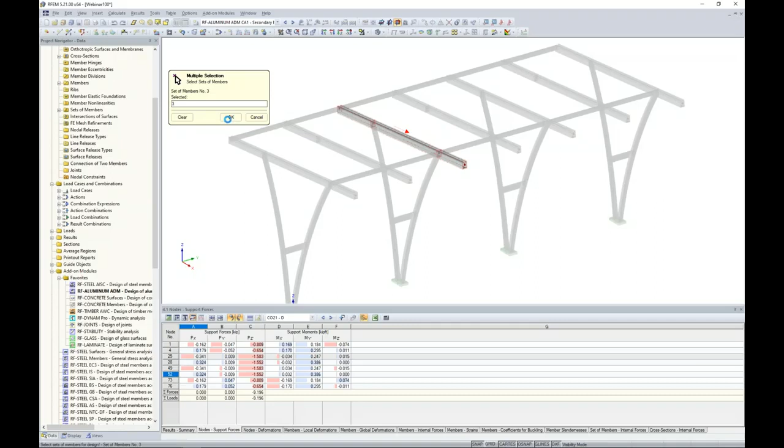This time, I want to design my set of members here. I click OK. Now, quite honestly, not much is different with sets of members until we get to some of these later tables. I want to select all of my LRFD load combinations according to the ADM 2015. Now, I will skip over serviceability limit state design just for the sake of time. So we'll only take a look at the ultimate limit state design.

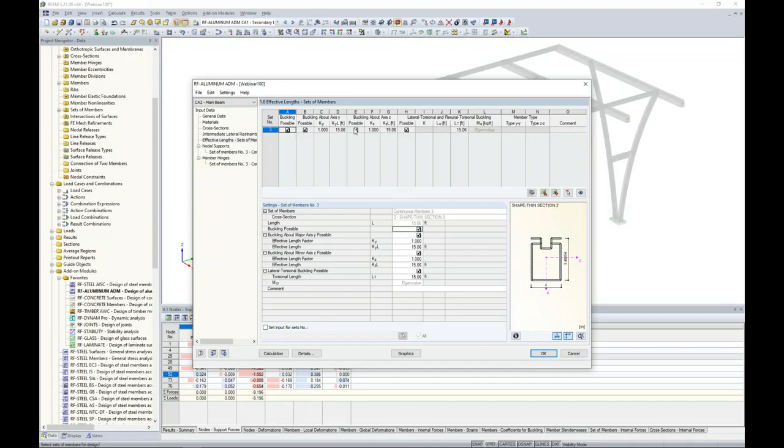And then we're just simply moving from top to bottom with our tables here with materials. Notice the cross section for our ShapeThin custom extruded section is available here with all the cross section properties that we calculated way back when. The effective length. So this table looks slightly different than what we saw for members, and now is effective lengths for sets of members. And some things are grayed out here. And that's because everything is actually controlled under our next table for nodal supports.

So similar to members, for sets of members, we are running an eigenvalue analysis for stability once again in the background. But what's more powerful about sets of members is that we have a bit more control over how we are specifying how those 4 degrees of freedom where our supports occur are actually fixed or released. So we can see here under nodal supports, which is a new table for sets of members, our individual set of members here.

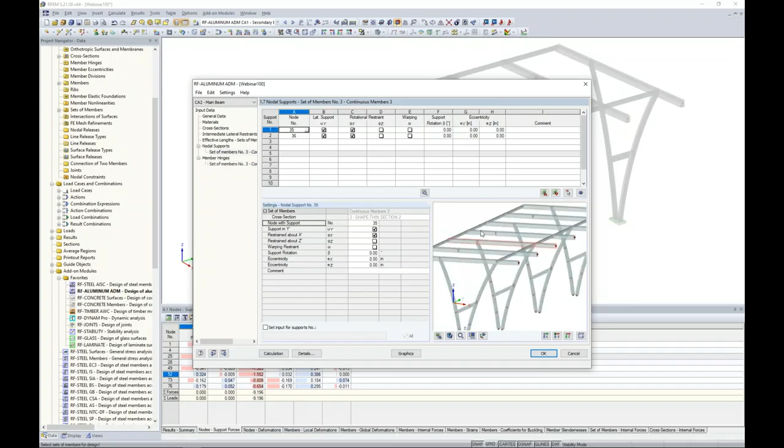And I can isolate this to take a look at the set of members and where the program has automatically placed these supports. Now, actually, this is not correct because I don't want to place a support on the right-hand side, but rather I need to move that back to where my lateral members are framing in as well as my column.

Well, that's no problem. All I need to do is just to graphically select my new node here, move it back to node 26. And actually, let's go ahead and try that again. I want node 26 and I also want node 35. There we go. So I've supported this individual set of members exactly where we have all these different members framing in.

Now, this is where I have my 4 degrees of freedom that I have the control to set now for sets of members. I think we can all agree that we do have lateral restraint because we have these transverse beams framing in at both of these support locations. Rotational restraint is the ability for the member to rotate about its own axis. And I would also agree here that maybe we are restrained in that aspect as well.

Now, rotation about the vertical axes. I would say that maybe for our front support here with our column framing in, we do have restraint about the vertical axes for rotation. Now, this is not applicable for our example today, but if we had warping restraint, we could also set that at any one of these supports.

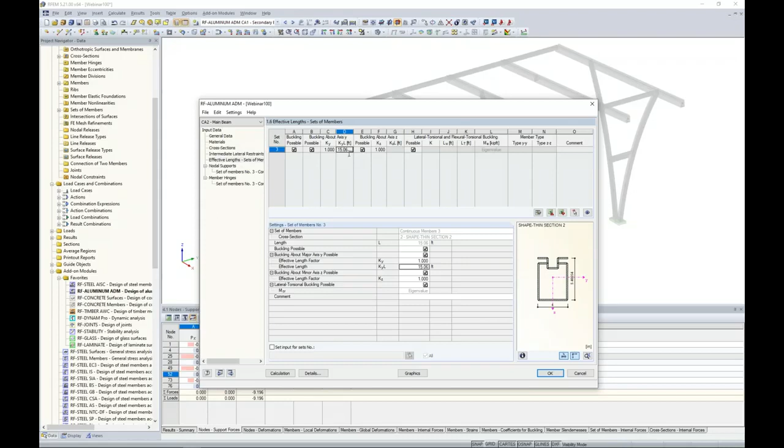What also is powerful about sets of members is that they don't necessarily have to be in a straight line. You can design a continuous member that doesn't lie in a straight line, but is in the same plane. So for strong axis buckling though, we do need to adjust this, and the worst case distance here is in between our 2 columns at 7.95 feet.

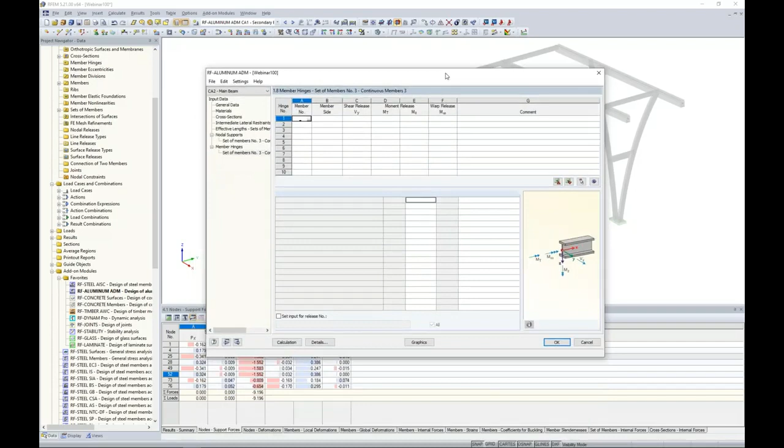So the last table here is member hinges. If we wanted to release any one of those 4 degrees of freedom along the set of members, we could do so here, but we don't have that for today's example. So then I can just click calculate. Again, it solves within a quick second, and we're presented with our results, and we can view design by sets of members. So same concept here.

We're going to present to you all of the different checks directly within the standard. And I wanted to point out of course stability analysis for lateral torsional buckling. And we can view our mode shape here for this set of members and what the program's actually doing in the background.

One thing I mentioned over and over again is the ability to check local buckling for these custom extruded sections. So that work that we put in within SHAPE-THIN for the element with the thickness ratios and whether it's closed or open on either end, well, you can see here that that's now all listed under the cross-section local buckling. So every single element is listed here. It shows whether it's in tension or compression, how it's classified, the slenderness.

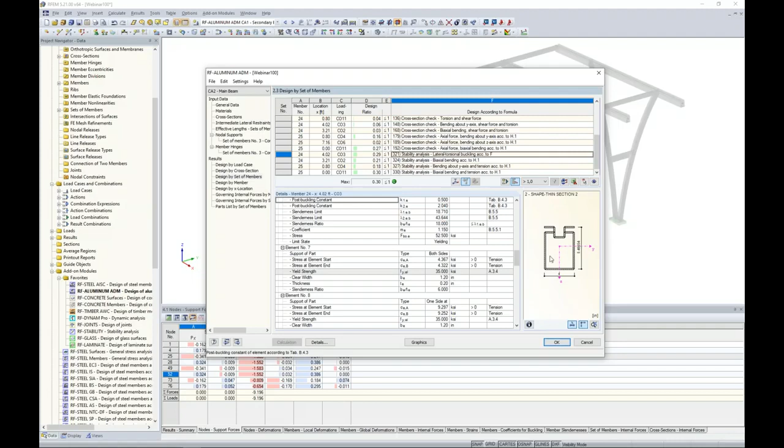So again, very powerful because not a lot of other programs have the capability. Of course, we can bring it in, we can do general design, but the ability to do local buckling for all of these individual lips and webs and flanges is pretty powerful. Okay, so that's essentially what I wanted to quickly show you for design by sets of members, and that will actually bring us to the end of our webinar today.